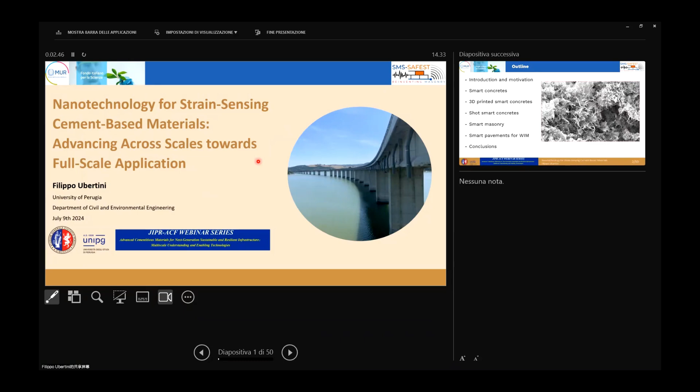So this talk is mostly about smart concrete research we have been doing at University of Perugia for the last 10 years. But I will also discuss a few new topics around this that we are working on at the University of Perugia, including 3D printing of smart concretes, the possibility of shooting smart concretes, and an important project we have just started on smart masonry, and a little bit on smart pavements for weigh-in-motion. Finally, I'll conclude the talk.

So the overall framework in which this talk frames is that of our aging infrastructure network. We all face similar problems around the world with our bridges and tunnels reaching the end of their service life and being subjected to different types of degradation and deterioration phenomena.

The problem in these structures is that damage initiates at a position where it is not visible. Think about corrosion in reinforced concrete or pre-stressed bridges. This damage then propagates, but it's still not visible, and when it creates a significant reduction in performance, leading the structure eventually to local or global collapse, it's actually too late. So what we really want to do is spot these kinds of damages before they actually generate a harmful situation.

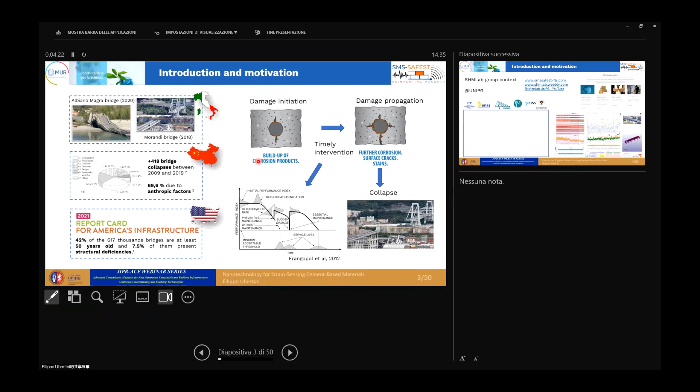This is what my group at the University of Perugia basically works on. Our focus is, in general, structural health monitoring, which means using information coming from different types of sensing systems installed in structures to understand when the structural behavior is changing and when there are issues that may lead to local or global structural failures. I would say the group is divided into two parts.

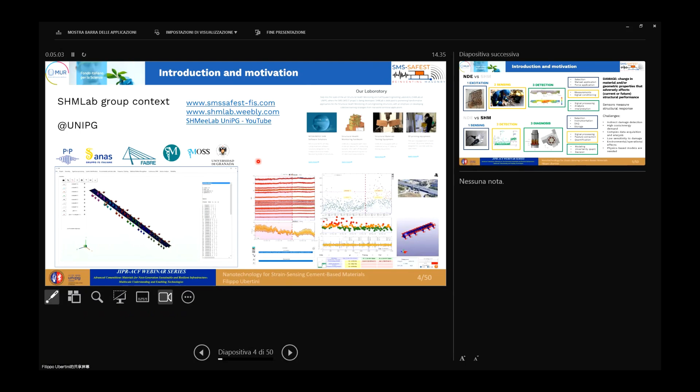There is one part of the group mostly working on signal processing. Today, a lot of machine learning and AI research in this field is being done, where the data comes from traditional sensors. So the innovative part is related to the algorithms of SHM, including the modeling part of the structures.

And then there is another part of the group that is instead devoted to developing advanced sensing systems - basically smart structural materials that can serve dual purposes. They can be structural materials, so sustain the loads, but they are also sensors, typically strain sensors or damage sensors.

This is what we do basically in the field of smart concrete, which is the topic I'm presenting today. The smart concrete provides the ability to sense strain by outputting a change in its electrical properties. The smart concrete can also sense damage, again by showing a change in its electrical resistance.

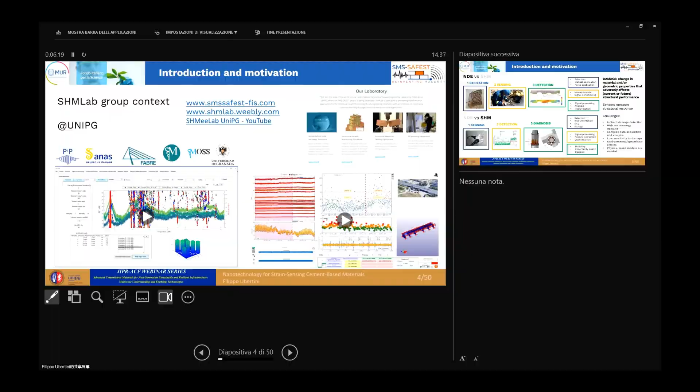So what you see here are a couple of software tools that we have developed recently. Let me change this - I would like to reload this one. Anyway, it's not loading - a couple of software tools we have recently developed in the framework of traditional structural health monitoring.

The one you see on the bottom left is a software we developed for ANAS - this symbol here - which is the biggest Italian road managing authority. ANAS is now monitoring about 1,000 bridges, and they are using our software for damage detection.

This one you see on the bottom right is a software that we call MOSS, which we use mostly for research purposes. Let me try to reload this one. This software contains a lot of algorithms for novelty analysis and damage detection in different structural systems. So basically, it contains the part of our research devoted to data analysis.

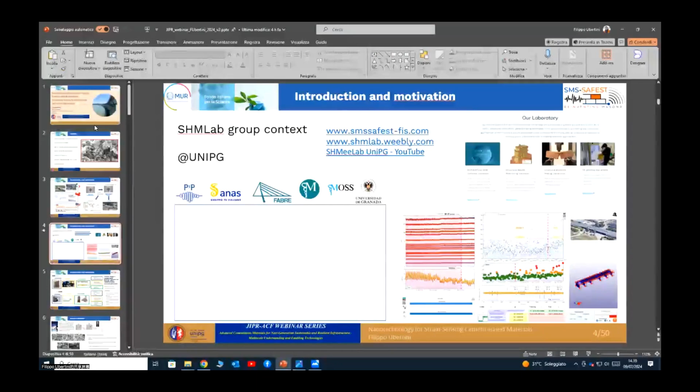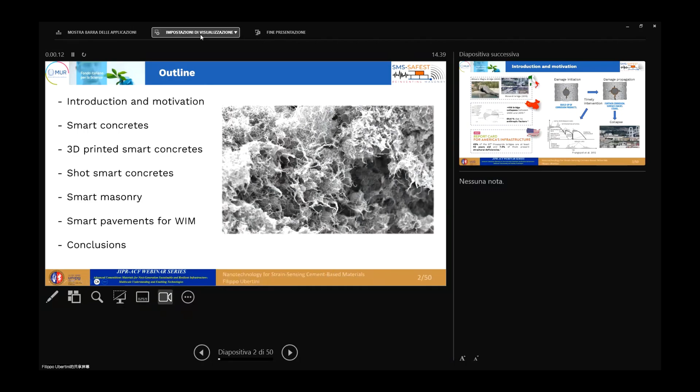The screen we are seeing now is the poster instead of your slide. So you haven't seen the slide so far? No, we are seeing the poster, probably because I have a double screen. Let me fix this. I'm sharing desktop 1. You see desktop 1? You still see the poster? Yes, but that's fine I think. No, you should see the slides. Now we are seeing the slide, the first page. Is it working now? Yes, it's working but not in full screen mode. Now it should be okay. It's good, okay.

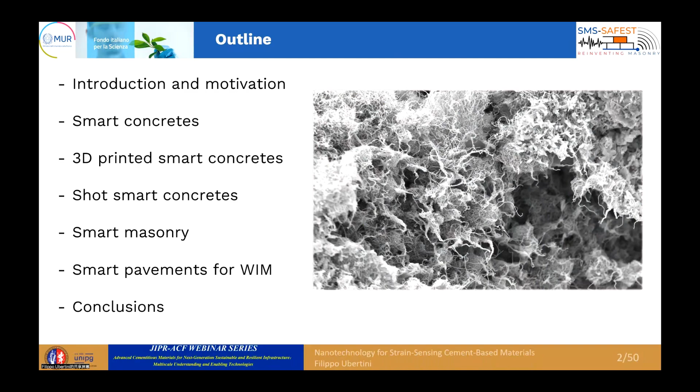So this was what I was reporting before, sorry for this. This was the outline when I was discussing the topics, and this was the slide when I was mentioning that we all have the same problems in the world related to aging infrastructure.

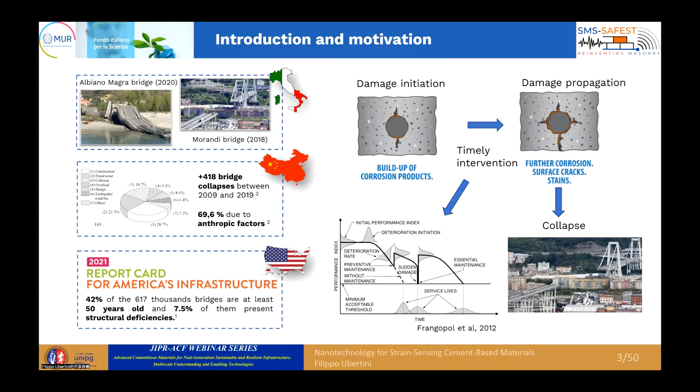About the damage initiation and propagation leading to collapse, which is what we want to avoid. I was saying that our group at University of Perugia is devoted to structural health monitoring, which means using information from sensors to understand structural conditions and to understand when a damage develops within a structure.

I was saying that the group is basically divided into two parts: half devoted to developing algorithms for SHM, including machine learning and AI efforts, and the other part devoted to developing innovative sensing systems for structural health monitoring. I was playing these two videos.

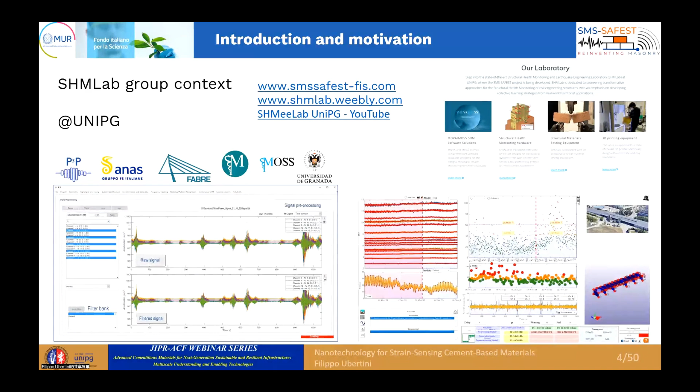Which now I'll comment on. You confirm, Jing, that you see the videos, right? Yes, we can see it very clear. Okay, this is an example of the research we are doing on data analysis and signal processing.

This is a software on the bottom left that we have developed for ANAS, this symbol here, which is the biggest Italian road managing authority. ANAS is now installing monitoring systems on more than 1,000 bridges across the country, and they are using our software for novelty analysis and damage detection, with an overall investment in the order of 300 million euros.

The other software you see on the bottom right is a software that we call MOSS, that we use in our group for research purposes, and that incorporates different algorithms from AI and machine learning for SHM. However, today I will not talk about this research. I'm just showing it to frame our group.

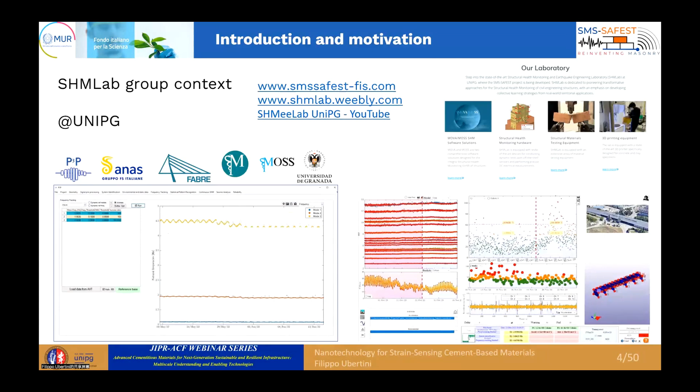I will talk about our research on smart materials, which are structural materials that can serve a dual purpose: being structural materials and also being sensors, strain sensors or damage sensors. I put here the website of the largest project we just started in my group, devoted to smart masonry, the Italian equivalent to the ERC grant. Then there is the webpage of our group and the YouTube channel of our group.

The type of smart materials I'm talking about today kind of cross between non-destructive evaluation and structural health monitoring. Non-destructive evaluation is basically the group of all techniques that we use to detect and quantify a defect in a structure by means of an inspection that we do periodically on the structure.

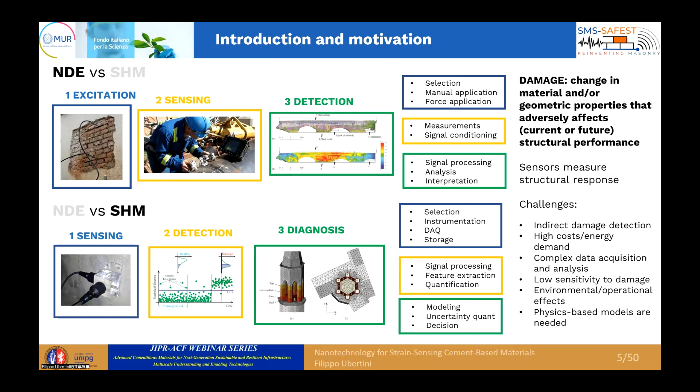Instead, in SHM, what we want to do is use data coming from sensors permanently installed in the structure to understand when the structural behavior changes and when there is damage. Smart concretes can be useful to speed up NDE, and they can be pretty useful for structural health monitoring.

So what are smart concretes? The way I like to introduce smart concretes is by recalling a famous axiom reported in the book by Chuck Farrar and Keith Worden. In their famous book on structural health monitoring, the authors stated that sensors cannot measure damage, and we need feature extraction to understand when there is damage.

Actually, smart concrete is a technology that aims to challenge this long-standing assumption by creating a material that is a structural material, but also a damage sensor. Or at least, when used for strain sensing, it can provide more direct information linked to the damage condition within the structure.

To give you an idea of how well a material like this works, I'm showing an experiment on a small cube of smart concrete fabricated in our lab, where in red you see the applied strain with a compressive machine, and in blue you see the electrical signal outputted by the material. You clearly see there is a very good correlation between the two.

Are you seeing my pointer right now? I think so, right? Yes.

Okay, thank you. So the way we transform normal concrete into such a very good strain sensor is by engineering its nanostructure or microstructure.

What we do is include within the matrix of the material conductive inclusions, mostly monodimensional inclusions like carbon nanotubes or carbon nanofibers. Sometimes we can also work with carbon black, though carbon black is spheroidal, or graphene, or different types of graphite. All these inclusions create inside the material a sort of network which allows it to become a strain sensor. I'll show you how in a while.

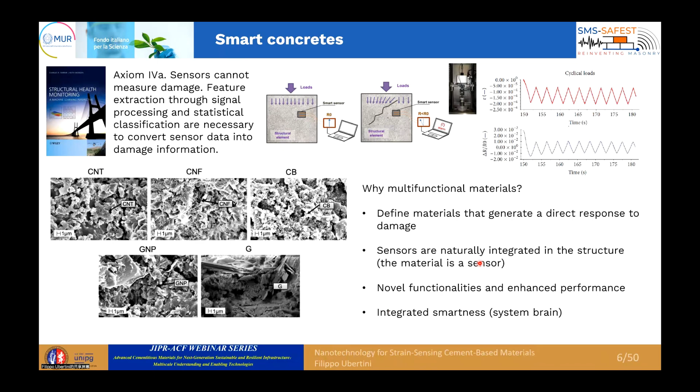I can have the material provided with novel functionalities like strain sensing, but also improved mechanical performance, and in general I can integrate the ability to sense information all through the structure. The way the smart concretes we're working on work is very simple, basically.

They are essentially strain sensors where the sensitivity comes mostly from the piezoresistive effect. These materials can also be used with different mechanisms of sensitivity, but this one is the most useful and attractive. Basically, the material, like a monodimensional conductor, when strained, changes its overall electrical resistance in a way proportional to the strain through a proportionality coefficient called the gauge factor.

The theory says the gauge factor is 1 plus 2 times the Poisson's coefficient plus the relative change in electrical resistivity under unit strain. This is known from electrical strain gauges, for instance, where the third term is basically negligible. In fact, in strain gauges we typically have gauge factor values around 2. In smart concretes, instead, we work on this last term and try to boost it as much as we can. This term is called piezoresistivity because it's the relative change in resistivity under unit strain.

So how can we change this piezoresistivity? By engineering, again, the nanostructure or microstructure of the material. The continuum will not be made of one single phase; it will be made of two phases, a matrix and the inclusions. The inclusions can be conductive monodimensional inclusions like multi-wall carbon nanotubes, as shown in this SEM picture.

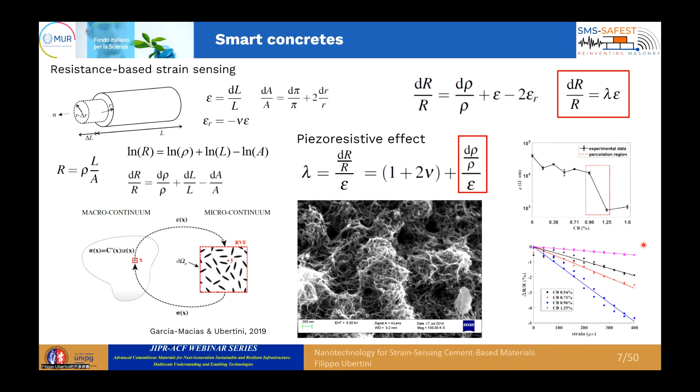We have a material that has the largest gauge factor with the largest piezoresistive contribution and has a very nice linear response. This is a percolation curve obtained in our lab for smart concrete.

There is literature that shows we can predict the percolation threshold analytically as a function of the properties of the fillers and the matrix, and most of all as a function of the aspect ratio of the fillers. The larger the aspect ratio, which is the ratio between length and diameter, the lower the percolation threshold. So if we use inclusions with high aspect ratio, we need fewer inclusions to gain a very good sensor.

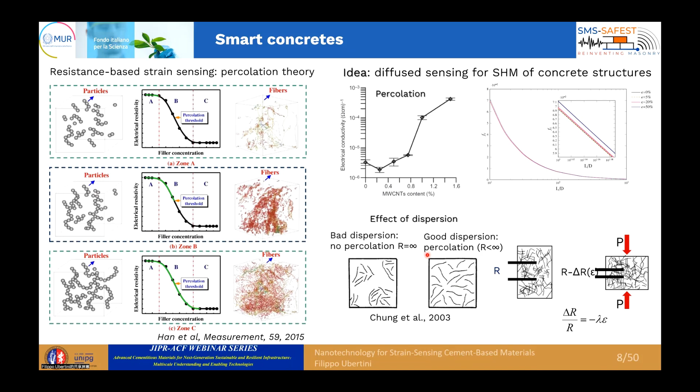What is very important is that we also need to optimize the dispersion of the fillers and be careful in achieving a good dispersion. Otherwise, the sensing behavior will not be very good.

Most of the work we have done on smart concretes is based on the use of multi-wall carbon nanotubes, which are excellent fillers due to their high aspect ratio for this kind of composite. However, multi-wall carbon nanotubes pose one formidable challenge: the difficulty in dispersing them in the smart concrete.

The way we do that is by dispersing the nanotubes in water first, and then adding cement and aggregates to generate the material. However, this dispersion may require procedures like magnetic stirring, sonication, or mechanical mixing, which may be difficult to apply when dealing with large casting volumes.

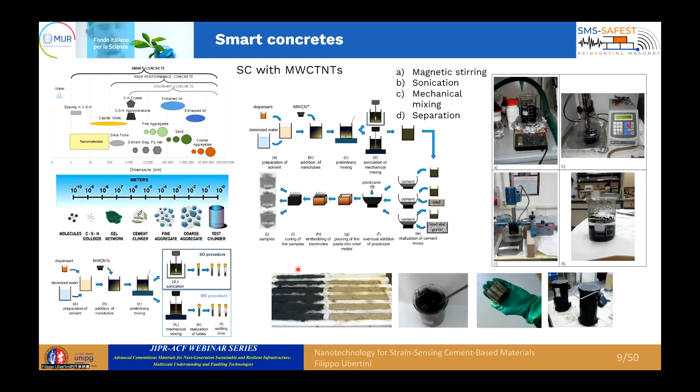Here is an example of inspection of nanotube dispersion in water and inspection of nanotube dispersion in the matrix. These SEM pictures are really important because you have to be sure that the nanotubes are well dispersed.

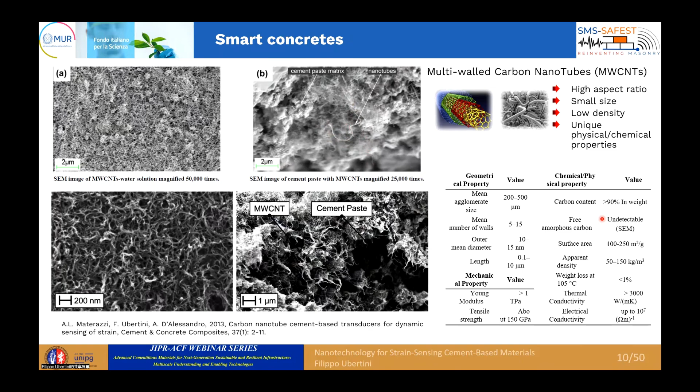This is, of course, done after the water dries. You should also inspect the hardened matrix of the material to be sure that the nanotubes are not broken after the mixing and dispersion process. This is really important if you want to exploit all the nice features the nanotubes can provide.

Here I'm showing you an example of increasing magnification of SEM pictures of nanotubes, showing how small they are and what kind of network they tend to create when agglomerated.

Here on top is an example of a bad dispersion. You see a coherent structure of nanotubes all agglomerated. On the bottom, you see an example of good dispersion. When you have a bad dispersion, you will observe that the nanotubes separate pretty fast from the water, in the order of minutes.

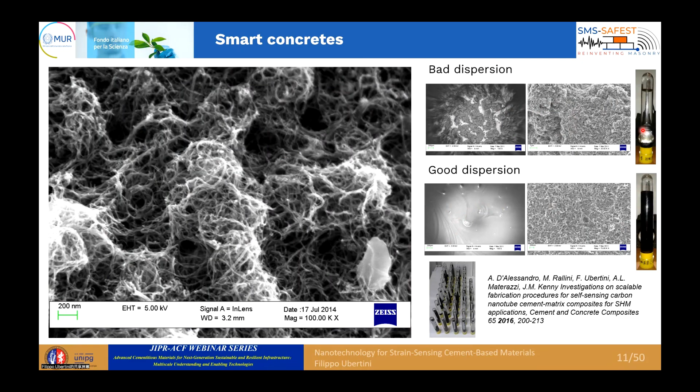When you have a good dispersion like this one, the nanotubes will take hours or maybe days to separate from the water, so that light on the back will not pass through the specimen.

So let's come to how we do the measurement with these materials. We have understood that the material is piezoresistive, a strain sensor, and can be a damage sensor. The way we extract this information from the hardened material with the nanotubes is by using externally attached electrodes. I have to say this is probably the main bottleneck of the technology so far.

There is research trying to get rid of the electrodes, which I think is one of the most promising avenues for research in this field. If we may do contactless measurements of strain, for instance using lasers, that would be a great step ahead.

Most of the research we have done was either using a 2-probe or a 4-probe measurement approach. In the 2-probe approach, we have 2 external electrodes attached on the material. We apply a constant electrical voltage at the 2 electrodes, measure the current crossing the specimen, and obtain the resistance through Ohm's law.

In the 4-probe method, instead, we apply a stabilized current at the 2 outermost electrodes, and then read the voltage drop across the internal electrodes.

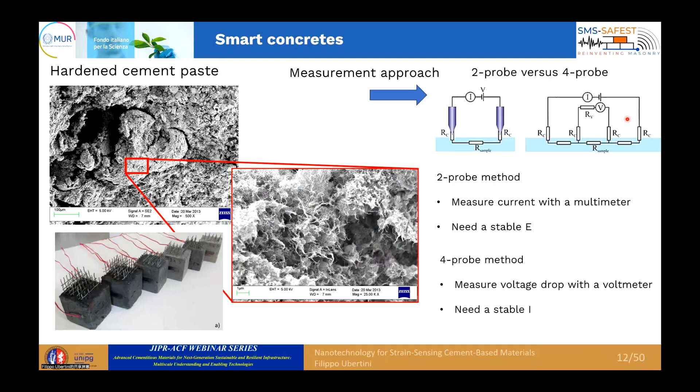The 4-probe method requires 4 electrodes, but has the advantage of being less affected by contact resistance. A very important achievement we did in this field was reducing the noise when using a 2-probe method. When you use DC power to power your sensors, you have a big problem with noise, and also a big problem with polarization. Polarization is the tendency of the material to show an apparent increase in electrical resistance due to the orientation of the dipoles within the material.

With this approach we have developed, which is based on coaxial cables, we have been able to eliminate the noise from the sensor through a cancellation of the noise by means of a cable where the internal core and the external part are coaxial, like we do in accelerometers. Basically, the noise in the internal part and the noise in the external part cancel out.

Here you see an example of a signal measured like this on a vibrating beam that I will show later on in an experiment.

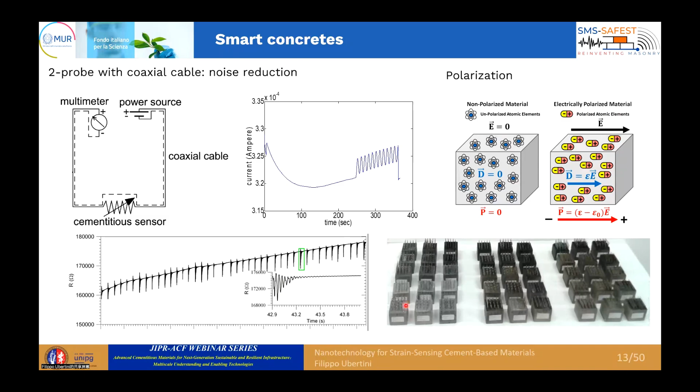Another great step ahead we did in this same field was developing an approach for measurement which is not direct current, but we call it biphasic direct current. So basically, with respect to the previous case, we are not applying a constant voltage to the two external probes, but we are applying a voltage which changes in time through a square wave, like I'm showing you in this graph. The voltage is applied with a plus-minus value in a square wave of a certain period, so we are basically discharging and recharging the sensor every time.

In this way, we actually get rid of the polarization, the fact that the material gets charged, because every time we charge the sensor, there is a part of the signal where we discharge it. We measure the electrical current flowing through the sensor during the application of this square wave, and then we take the 80% of the period of the square wave as the point where we extract the resistance of the sensor.

In this way, we get results like this. These are values of the sensitivity of the sensor in terms of change in resistance versus applied strain as a function of frequency, which is almost constant. But more importantly, we get signals in time like the one shown here in the bottom right. So basically, in DC, we have a resistance that increases in time due to polarization. But when we do biphasic DC, our approach with a square wave having different frequencies from 1 Hz to 400 Hz, you clearly see that the signal has no drift, is stable in time, which was our goal.

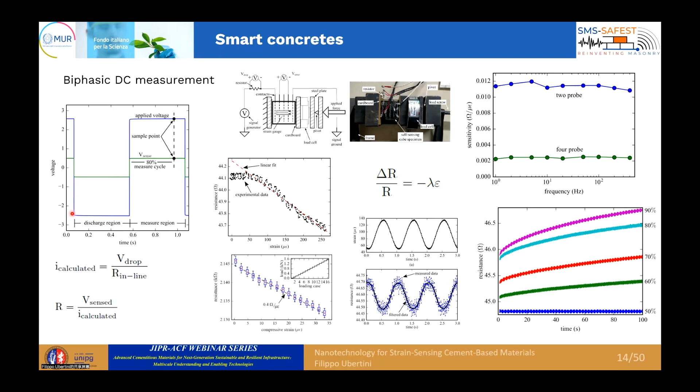We are now developing the electronics to do this kind of measurement. Instead of using off-the-shelf and very expensive equipment, we are developing internally what we call a smart material electrometer. We have a postdoc in my group who is an expert in electronics doing this development. The smart material electrometer can do 2-probe or 4-probe measurements, DC and biphasic DC measurements, and it can do that in a multi-channel configuration.

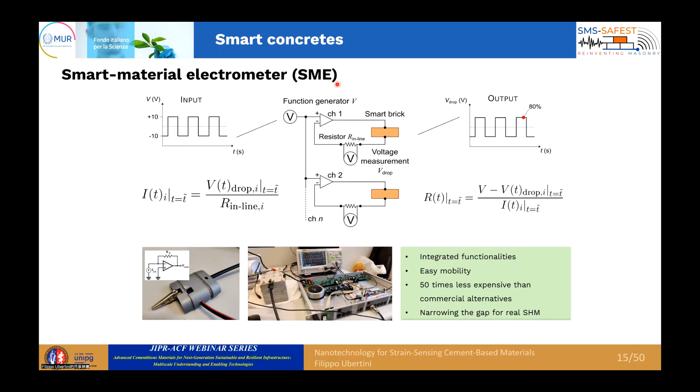So we can measure from many sensing units. We are doing this with low-cost electronics so that the overall cost of the smart material electrometer is around a couple hundred dollars, while what you take from the market can be orders of magnitude more expensive, at least in the order of thousands of dollars.

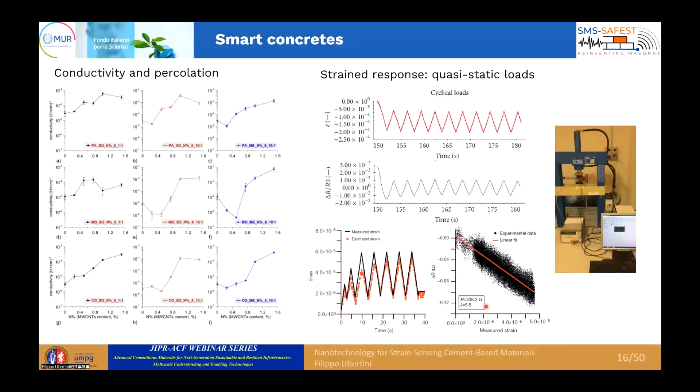When we have a clear percolation, we have a clear sensing, like I'm showing you here. This is the same result I was showing you before, and we also have a very good linearity between change in resistance and measured strain, as you see in this graph.

We have also studied a lot the strain response when the loads are dynamic. Since our group is very active in vibration monitoring, we have studied the response of these smart materials to vibrating strains, so dynamic strains. We are among the very few groups that have done this in the literature. Actually, these sensors work pretty well when we try to measure vibrations, even better than when we try to measure quantities that vary slowly in time. But the key here was what I've shown you before, the use of coaxial cables to remove the noise.

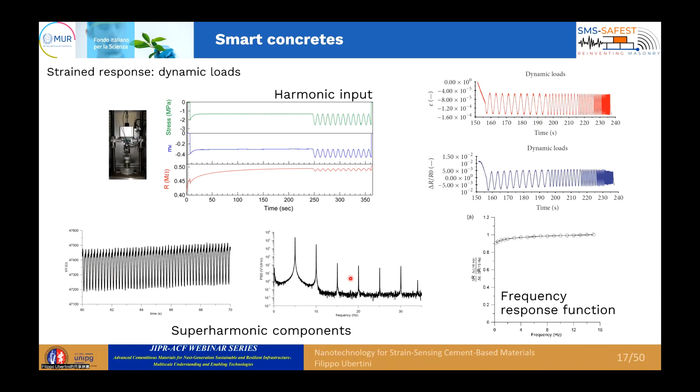One limitation we have when we use these sensors for dynamic monitoring is that if you apply a harmonic load, the response will still be periodic, but will not be harmonic. So it will comprise, like in this case, superharmonic components. And for this, I will have an explanation later on when I talk about modeling aspects.

So we have used this capability of the sensors to measure vibrating strains to demonstrate that we can do modal identification of structures using cement-based carbon nanotube sensors. This is an old experiment. We did this experiment more than 10 years ago on a vibrating beam with attached smart concrete sensors, and we obtained the results that I've shown you in the previous slide.

Jing, I got a message from the system. You're still hearing me, right? Jing, you still hear me? Yes, yes, yeah, okay, sorry, because there was a message.

And you also see the drift in time due to the polarization of the material. Actually, by applying a high-pass filter, you can easily remove this drift and obtain a signal like this. Of course, you lose the average component, but if you are doing modal identification, this is not important. And analyzing the spectral plot of this signal, you obtain the natural frequencies of the beam pretty well. So we demonstrated that we can do identification of the beam using this kind of sensors.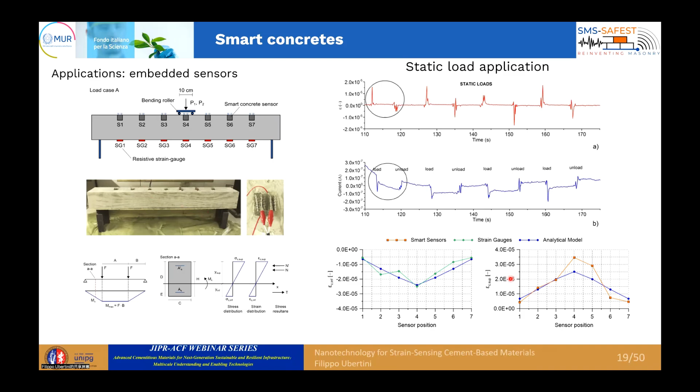This is one person that was jumping, that was stepping onto this beam. And also the strain that we measure makes sense with respect to the theory that we expect from Euler-Bernoulli beam theory. More importantly, doing an experiment like before, maybe we have less signal to noise ratio because the sensors are embedded, but still we have pretty nice free vibration signals extracted from the sensors.

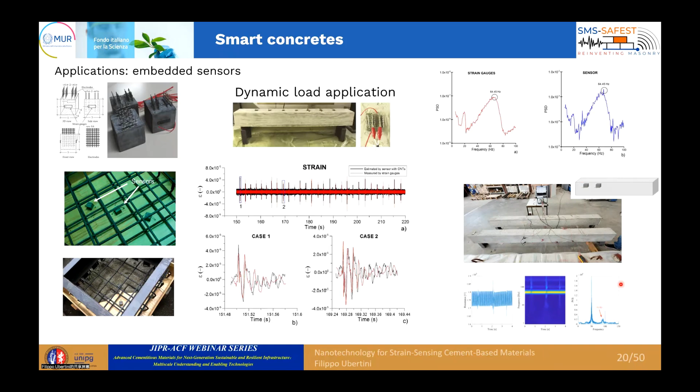In black is the sensor, in red is the strain gauge attached on the sensor for benchmark. And we clearly see that we can identify the natural frequencies of this vibrating beam. We are now doing similar experiments on larger beams, including beams that are fully made of smart concrete. So this was about the measurement.

Let's come now to other types of application and then the modeling. An interesting application is the bulk form, when the material is fully made of smart concrete. In this way, we need a multi-channel configuration to measure the electrical resistance across different pairs of electrodes along the beam, like we have done in this example here.

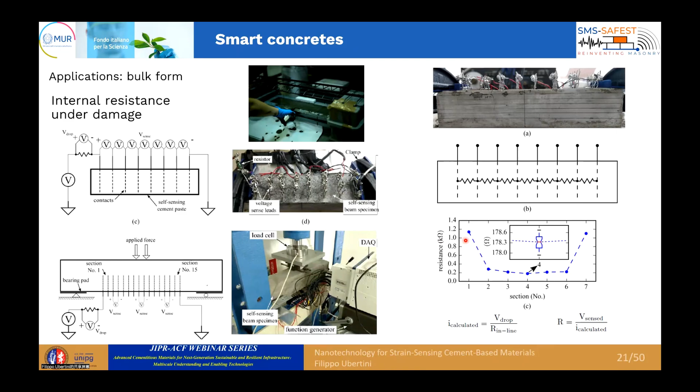The type of results you obtain are like this, where basically in each section you obtain more or less the same resistance, with larger resistances only at the outermost electrodes, which are affected by local phenomena at the contacts.

The resistance we measure across different pairs of electrodes is pretty much sensitive to strain. Here I'm showing an entire beam made of cement paste with multi-wall carbon nanotubes, tested in a 4-point bending scheme. You see the change in voltage in different sections as a function of load, with different sections responding more due to larger strain. You can see the piezoresistive effect, where the change in voltage, meaning the increase in resistance, increases with the applied load.

Then when a crack appears, something happens: this curve goes down and this curve goes up, because internally the material is sensing the damage, not the strain. So you have changes in local measurements of electrical resistance. It's important that the crack was audible through an audio system here, but the change was already spotted before. So we are sensing the damage when it's a micro crack, not visible, and it cannot be detected by acoustic emission, at least not easily.

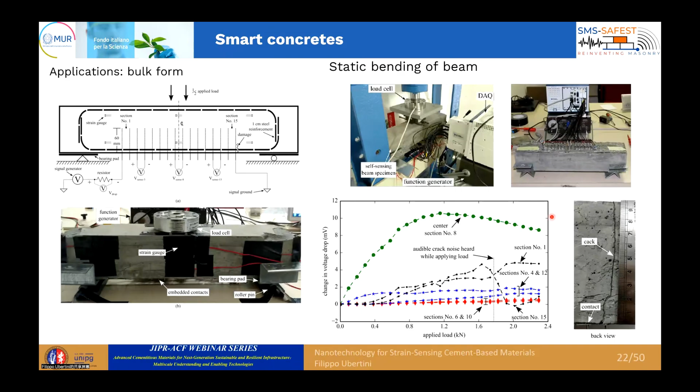We have applied similar concepts to bidimensional elements like this plate, subjected to controlled impacts. The plate was equipped with many electrodes and made of cement paste with carbon nanotubes. Again, we obtain an overall electrical resistance of the plate that is sensitive to the damage, which in this case is the number of impacts. Already at a very low number of impacts, the overall resistance of the plate is increasing. Locally, we have values of resistance that are decreasing and values that are actually increasing. Overall it's increasing; locally it can be increasing or decreasing. So this is also very sensitive to damage, well before the damage is as large as what I'm showing here.

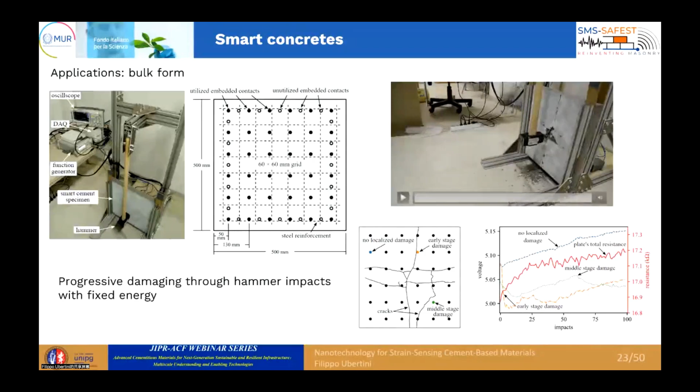But if we want to understand and model how these materials behave, we need interpretation models. So I'm proposing different strategies we can use to model the behavior of these materials. The most powerful one is based on micromechanics methods. Micromechanics approaches are basically analytical approaches that try to estimate the overall average properties of a composite, starting from the properties of the matrix and the inclusions, and considering the way in which the inclusions are distributed within the matrix. These micromechanics methods are well known to predict the elastic properties of composites, and have been used by our group to predict the sensing, the electrical conductivity, and the sensing properties of smart concretes.

In micromechanics approaches, I will at the end give you a list of papers we have published, and if you are interested, during question time you may ask, and I will also be very pleased to answer emails even later on.

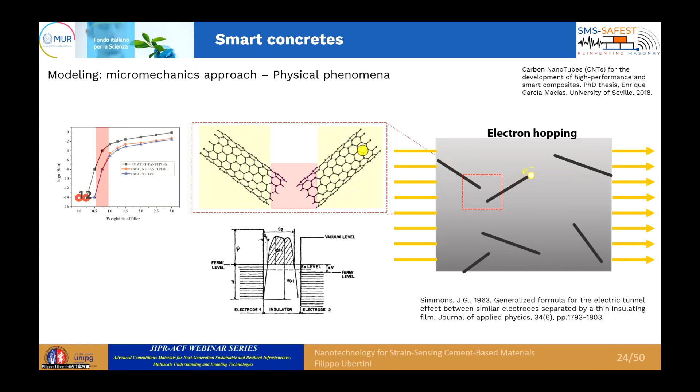In the micromechanics approach, we have the possibility of considering all the physical phenomena happening inside this kind of composite. How does an electron pass from one nanotube to another, or one inclusion to another? There are different mechanisms. The most important is electron hopping, a quantum mechanics phenomenon where the electron jumps from one nanotube to the other even if they don't touch, winning an energetic barrier. The probability of the electron jumping increases as the distance between nanotubes decreases. When we increase the amount of fillers and reach a situation where fillers start to be in contact with each other, that's when we are percolating.

After percolation, all the fillers will be connected and there will be a continuous network inside the material. Below percolation, we have the coexistence of two types of phenomena for the movement of electrons: one is through the conductive network where nanotubes touch each other, and the other is electron hopping. So we can predict the equivalent conductivity tensor of the composite, considering a representative volume element that is statistically representative of the overall material, through mean field homogenization theory, particularly the Mori-Tanaka extension of Eshelby's problem considering single inclusions. The main equation is this one, where the conductivity tensor is actually a mixture of the conductivity tensor of the matrix plus the fraction of inclusions multiplying the conductivity tensor of the inclusion.

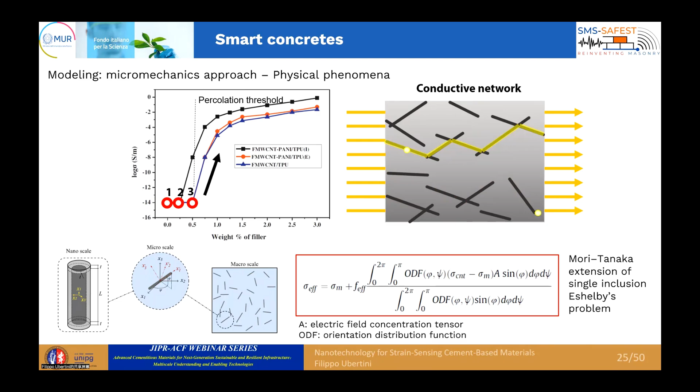In these integrals you have to take, there is a function A, which is called the electric field concentration tensor, and then there is a function ODF, the orientation distribution function, which considers the possibility that the nanotubes are not oriented uniformly at random, but might be preferably oriented in one direction. So in this analytical framework, we have included some key aspects found in these materials.

First of all, the nanotubes are not straight. They are kind of twisted. So we have included waviness of the nanotubes inside the formulation in a very simple equivalent way.

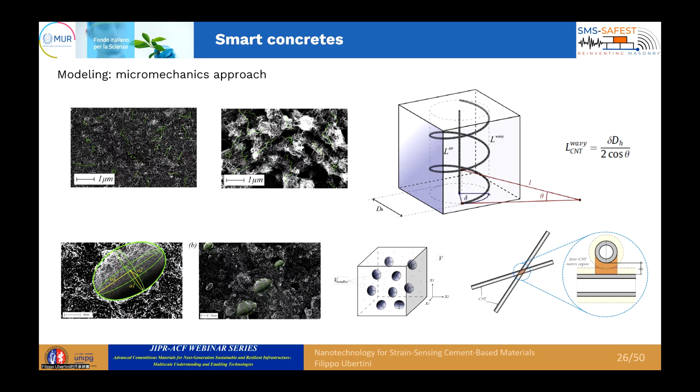We also consider the fact that the nanotubes tend to agglomerate. Even though you do your best to distribute them uniformly, you will still have some bundles within the material. So part of the nanotubes will be aggregated in bundles and part will be free inside the matrix. We also consider that, and we model the interaction between nanotubes through a special interface element and interface equation.

So the way we consider the bundles is this: we have two dimensionless quantities. One is the ratio between the volume occupied by the bundles and the overall volume of the representative volume element. When this quantity equals 1, it means the bundle is actually the whole material.

And zeta describes the volume of nanotubes dispersed in the bundles with respect to the total volume of nanotubes in the representative volume element. If this goes to 1, it means all nanotubes are in the bundles and not in the matrix. This approach merges electrical conductivity with mechanical properties, I haven't shown you the equations for strain and stress tensors, but this is known from literature.

Since we merge these two aspects, we are also able to predict how electrical properties change with applied strain. For instance, when there is a uniaxial strain applied in one direction, the nanotubes will tend to orient more in that direction. We can consider that through an orientation distribution function that assumes values different from 1.

Also, when we apply strain, the volume of the material will change, meaning the average distance between nanotubes will change. This increases the probability of electron hopping for nanotubes not in contact with each other, and also reduces the contact resistance between nanotubes that are in contact.

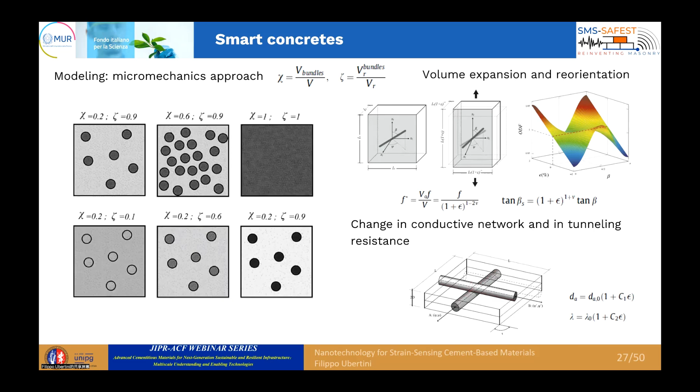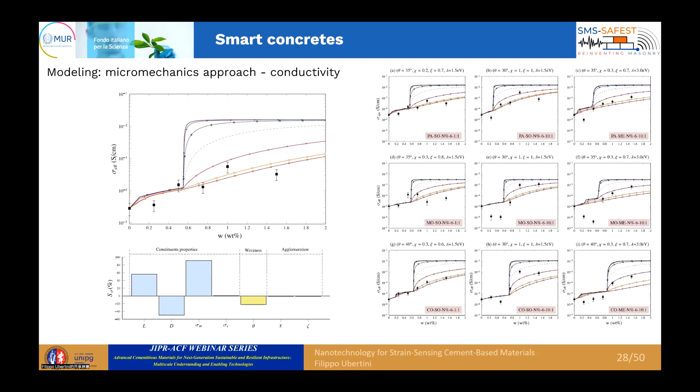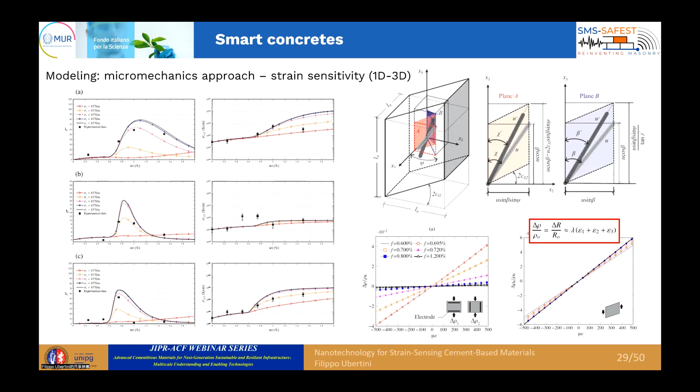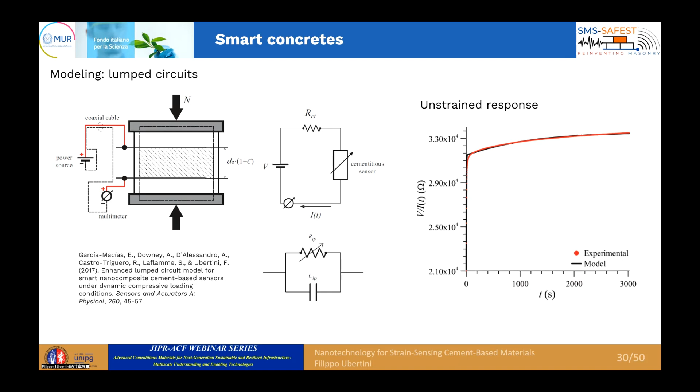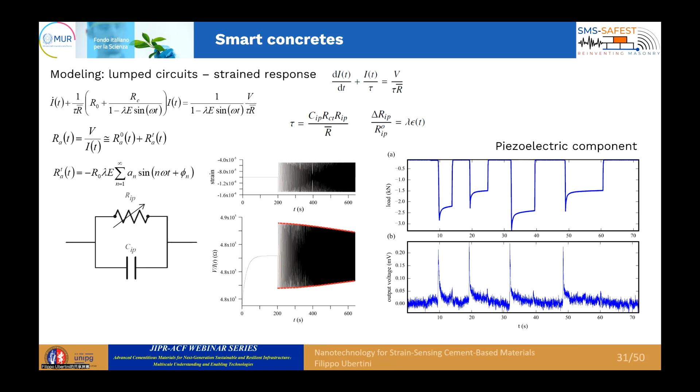We also used this equivalent circuit to predict the dynamic response of the sensor. However, we found that if we do that, we obtain analytically a response whose amplitude decreases with increasing frequency of the mechanical load. This is not what we expected, and it's not what we observed from the experiments. So we discovered that the material contains a little bit of piezoelectric effect. Piezoelectric means that when it's strained, the material provides a little bit of voltage, even if it's not powered.

We found that adding this piezoelectric component within our lumped circuit, and also making the circuit more general to consider changes in capacitance due to strain - since the material is also piezocapacitive - and including an electrode interface path between electrodes and material and between nanotubes and matrix, we could obtain a generalized lumped circuit equation that matched better than any other model our experiments. It was also able to reproduce the frequency response curve increasing with the frequency of the load, and the presence of superharmonic components in the dynamic response under harmonic loading, which I mentioned at the beginning.

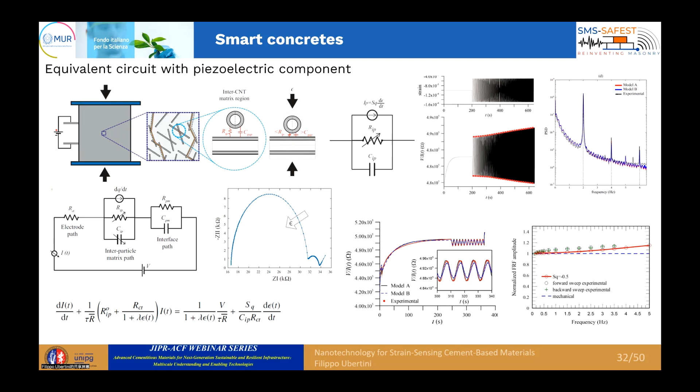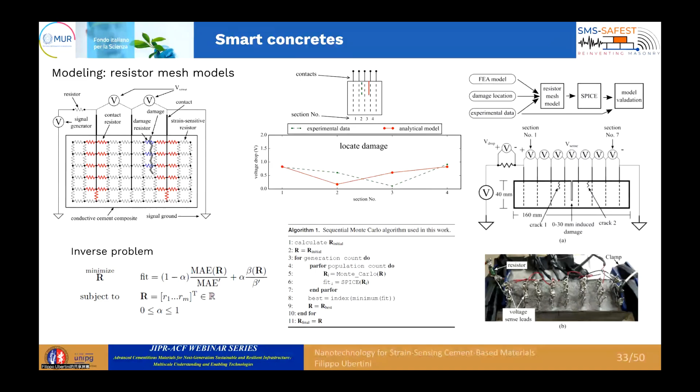Only when the crack in the analytical model is actually in its actual position, I will get a good match with the experiment. We have applied this also in more complex examples.

In this case, I show you how a voltage drop increases with the cut length. Here is the experiment I was showing you before regarding the 4-point bending test on the beam made of smart concrete with carbon nanotubes. Recall that I showed you this change in voltage drop increases with the applied load, and then changing in certain sections when the damage initiated.

Actually, with a model like this, with a resistor mesh model, we were able to reproduce this behavior. Here you see a comparison between experimental results with continuous lines and analytical results with dashed lines. You see that the analytical results follow pretty well the experimental one. At least they have the same tendency.

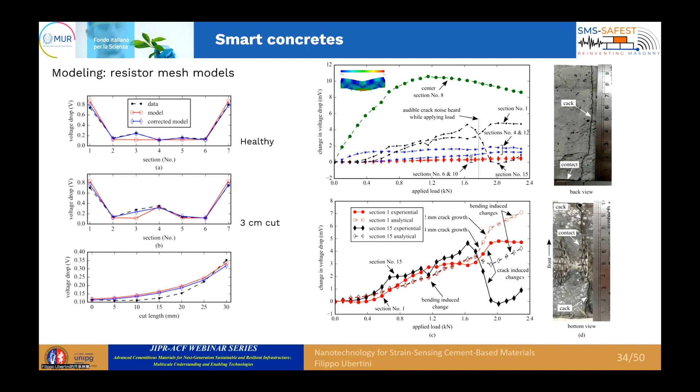Maybe they do not really match well, but when the red goes up, the experimental goes up, also the analytical goes up, and when the black experimental goes down, the analytical goes down. So at least we have something that resembles pretty well what we observe in practice.

We apply the same fitting procedure also to this two-dimensional plate example here. This is the values of the resistances we obtain by fitting. This is a map of these values of the resistors by fitting this map before the damage, and this is after some damage. If I take the difference between this and this, I obtain the plot on the bottom right.

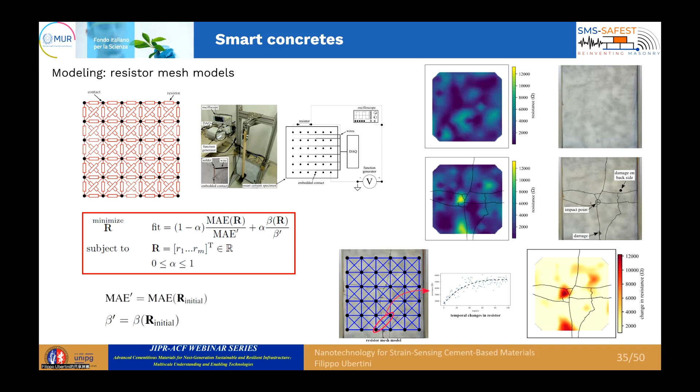So you clearly see that I can spot the regions of most prominent damage. It's a sort of tomography where at least I can spot the regions of larger damage when the damage is not strongly visible. And if I inspect the value of one resistor with the number of impacts, you see that it increases with increasing damage level.

Okay, this was pretty much our past research on smart concretes. I will now spend 15 more minutes regarding the future work that we are starting right now, and I will tell you a little bit about different projects going on in this research line within my group.

First of all, 3D printing. 3D printing is a very attractive technology, and we think that 3D printing as smart material is really something very appealing, because we can use sensing properties where we need them. So basically, when you print a structure, there is a critical part. In that critical part, you will print a smart concrete instead of a normal concrete.

Also, these kind of 3D printed structures can be very challenging from a structural point of view. So we may try to reduce the dimensions of the elements, but we need to know what is the strain condition within the elements, so I need sensors. And what best than a sensor that is built with the same material of the structure when the structure is built? So right now we are playing with cement-based materials with carbon microfibers, not nanotubes.

This is a small 3D printer in our lab, and here is a video of a sensor we were printing just a few months ago, just to show that we are at the beginning of this, but we are already able to print the doped material and to create sensors, at least to test piezoresistivity.

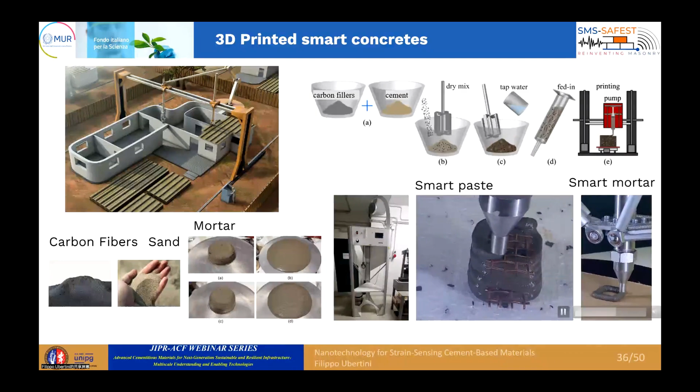So I'm showing you some preliminary results on this. We have been doing this experiment together with colleague Professor Simon Laflamme from Iowa State University. We have investigated the quality of the dispersion of the microfibers through heating the sensor. So if the sensor heats in this inhomogeneous way, then I have a temperature distribution like this, that is at least bimodal. Then it means that the dispersion of the microfibers is not good.

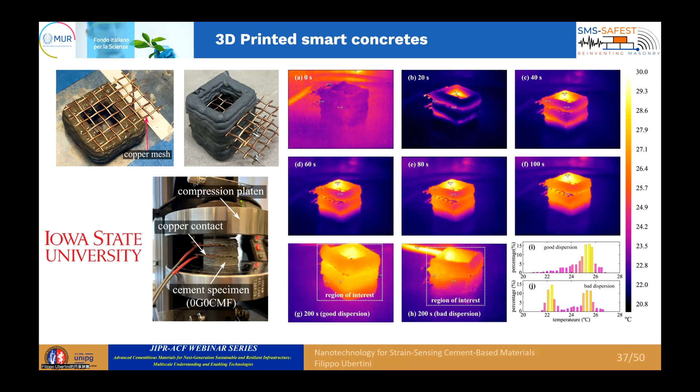Instead, when the material heats in a more homogeneous way, with the temperature following a monomodal distribution, then it means that we have a better distribution of the microfibers. And when the distribution is good, actually these 3D printed materials can be very good strain sensors. Here I'm showing you some example of specimens where you see relative change in resistance versus strain, in some cases with pretty nice linearity.

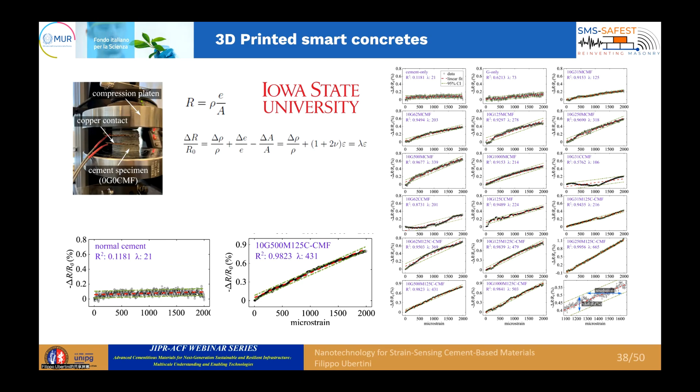Another very interesting application, in our opinion, is shooting these smart concretes to construct structural elements. So this was the result of a large project that we ended recently. In this project, we were investigating earth cement materials.

So materials where 2/3 of the cement is substituted by raw earth to obtain sustainable material. But then we added carbon microfibers to improve a little bit the tensile behavior, but mostly to obtain strain sensing capabilities.

Here you see, for instance, a tensile test in 3-point bending, where you see the failure in tension, and here you see there is a jump in conductivity. So the material senses the damage.

We developed the material for spraying, like we are showing in this picture of the test we did in the lab. We sprayed an entire vault, a shallow vault like this one, made of this smart concrete, that we tested until failure.

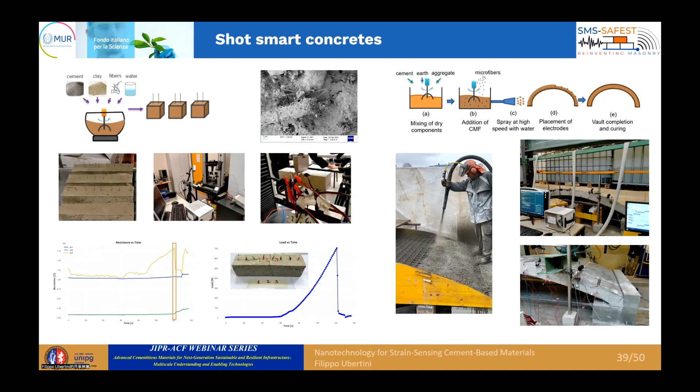First, we tested with uniform load coming from water, filled elements, and then applying a force at 1/4 of the span of the vault.

Here is the experiment where we apply the force here, we measure displacement with LVDT sensors at these points, and we measure voltage drops across these pairs of electrodes, which have the same length as the width of the vault.

Here you see a video of the vault being tested to failure. This was a displacement control test, so this is a time-lapse video, but the test lasted several hours. You clearly see we have good ductility because we have a tie rod here, so we are able to form a 4-hinge failure mechanism.

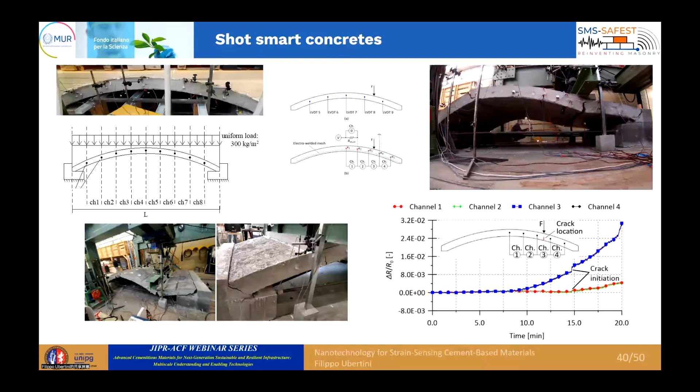We were measuring with our smart material electrometer the voltage drops across the different pairs of electrodes throughout the experiment. Here I'm showing what we measured in the 4 channels in terms of relative change in resistance versus time during the test. You clearly see that as long as I was loading the vault, we show increases depending on the channels.

In channel 3 and channel 4, which is where the crack is located, we see a clear jump when the crack started to initiate, and then we have an evolution of the relative change in resistance that increases with the applied load.

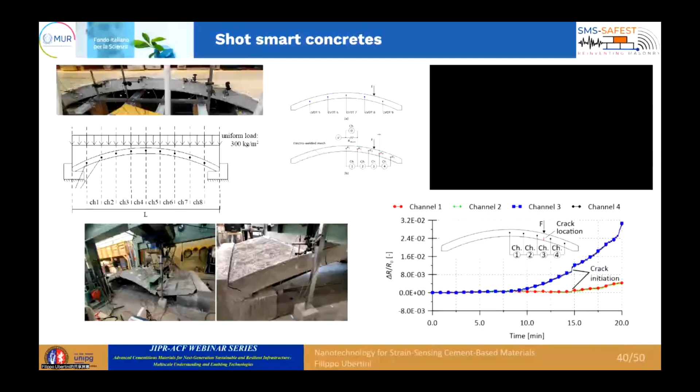To interpret what we are reading, we built a multi-physics computational model in Abaqus, where we model the mechanical behavior of the material through the concrete damage plasticity model, considering damage in compression and in tension. We also included the piezoresistivity of the material, so relative change in resistivity proportional to the trace of the strain tensor, basically proportional to the volumetric strain.

We reproduced the change in conductivity with the damage through what we call permeability. The permeability is a factor that multiplies the conductivity, going from 1 to 0 following curves that need to be identified based on the properties of the material, as a function of the damage variables in tension and compression.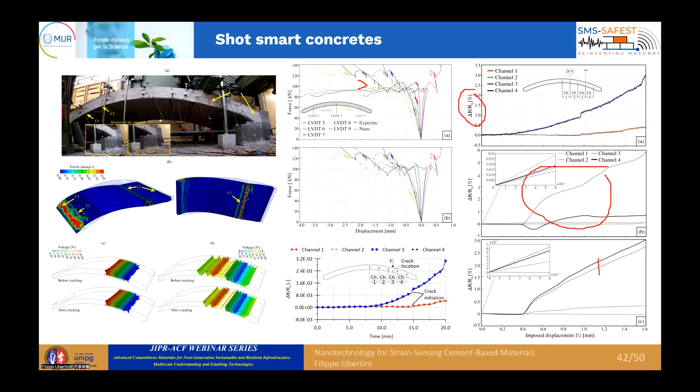We found that to obtain these kinds of results, it was very important to model the rebars inside the vault. This simulation shows that we can actually model with multi-physics approaches the response of these materials and use the models for damage identification.

Another important project we just started is the SMS Safest project, an Italian advanced grant from the Italian Science Foundation, which funded this research that will last for the next 5 years, devoted to developing an innovative approach for monitoring masonry structures subjected to earthquakes.

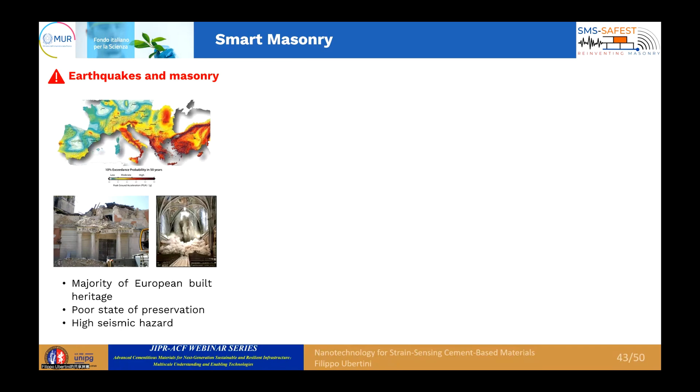Masonry structures form the majority of our cultural heritage structures, which are especially vulnerable to this kind of loading. So the idea is, instead of relying on traditional SHM, which has bottlenecks like scalability, durability, transmission problems, cost, aesthetics, and so on, to use smart sensors, as I was discussing before.

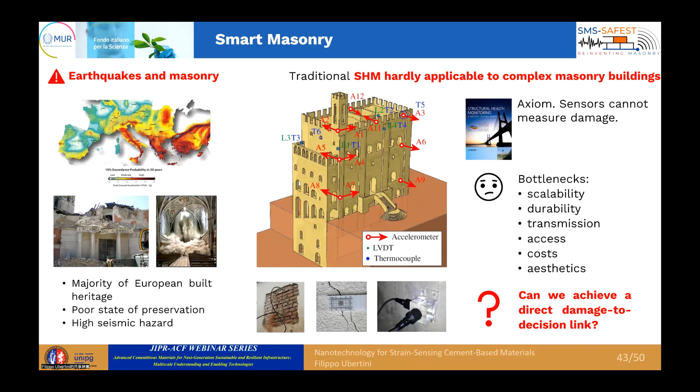So how do we want to use the smart sensors? Basically, we aim to develop smart bricks.

Smart bricks are very similar to normal clay bricks, but they contain a change in their microstructure through the use of, for instance, metallic conductive fillers, which can work similarly to smart concretes. The behavior is a little more complex because we have more metallic phases within the material, but in any case we can get a response like this.

This is the applied load in yellow, this is the measured strain on a brick tested in the lab, and this is the electrical response of the brick. You see that when the compressive strain increases, the electrical resistance decreases and vice versa.

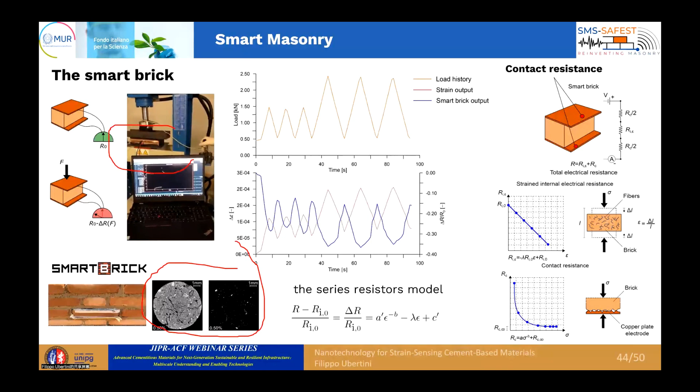The behavior is more complex because here we have two-dimensional electrodes, so we need to consider contact sensing and contact resistance, which is also sensing, as well as internal sensing. We are also developing smart mortars, which are lime-based or cement-based mortars with suitable inclusions to obtain the ability to sense damage.

In these videos, which are really preliminary, hopefully they will start. Let's see if they start. Let me see why this is not working. Maybe I can have it run like this. Maybe not, I don't know. This was working before the talk. Sorry, anyway it's okay, I don't know why this video was not working. Maybe in question time I will be able to make it work. Maybe now, okay, now you should see it.

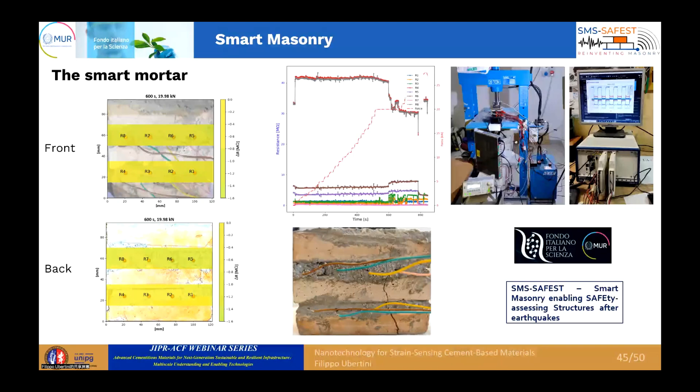It's getting dark, you see, as time increases, load is increasing. You should see at a certain point, in the bottom left part, there you go, a changing color. This changing color is when the crack forms, and the crack is not visible, it's a micro crack within the mortar layer. This is very preliminary, but it's just to show you what we would like to do: developing bricks that can measure strain and mortars that can measure directly the damage.

The last application I'd like to mention is smart pavements for weighing in motion. These are smart pavements that can sense the loads coming from a vehicle, and we can use this for high fidelity, low cost weighing in motion of the vehicle.

We have developed the algorithm that does the weighing in motion, the material, which is an asphalt with carbon microfibers, and the electrical configuration and software to do the analysis. Here you see typical signals and the signals reconstructed with our algorithm, where the parameters of the algorithm are actually the weights of the different axles of the vehicle.

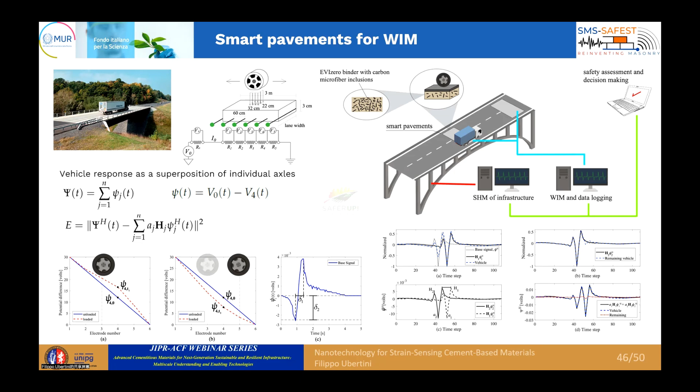Here you see a field test video, a truck passing over our test site, and the type of electrical signal we get, where we measure all the peaks related to the different axles.

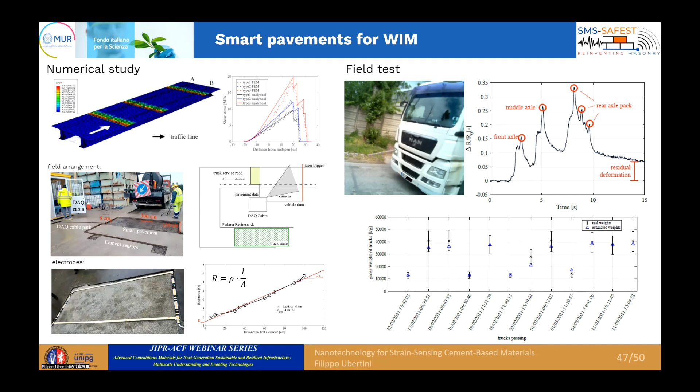What we need to do now is continue developing this, working with different velocities of the truck, and also working with temperature changes.

With this, I'm done. I will not say conclusions, except that I tried to show you how smart concretes are really an attractive technology, and also the different branches of this research and where we are going right now within my group.